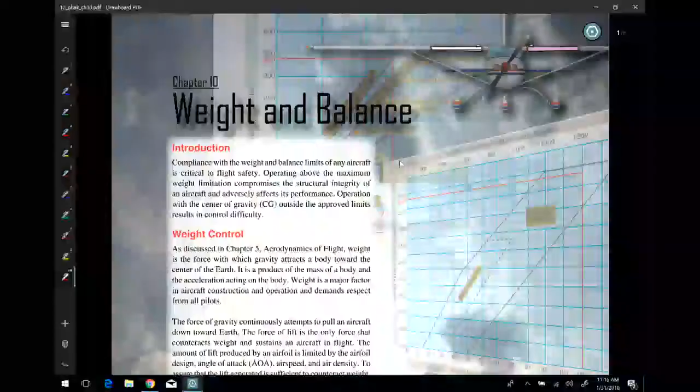So what I want to show you first here, again in Chapter 10, is we talk about, first of all, kind of the weight of the airplane. We know that the weight of an airplane impacts a lot of different things with regard to how that airplane, or if that airplane, is going to fly. So we have to talk about those things, and we have to know what it is.

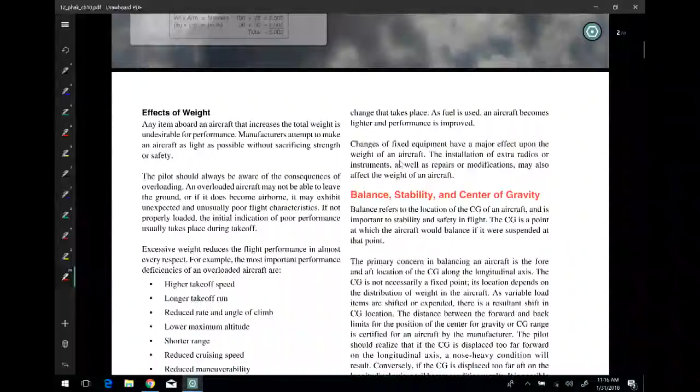So I want you to know all of these bullet points. When it says the most important performance deficiencies of an overloaded aircraft are, in other words, what are some of the bad things that a heavy airplane can do? So with this, you've got a higher takeoff speed, longer takeoff run, reduced rate and angle of climb, lower max altitude, shorter range, reduced cruising speed, reduced maneuverability, higher stall speed, higher approach and landing speed, longer landing roll, excessive weight on the nose wheel and or tail.

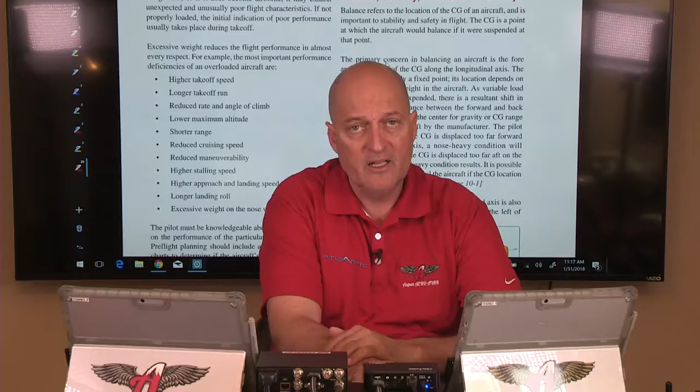How many awesome things does weight add to the equation? Well, not many. Unless you're thinking about carrying that extra passenger. Oh, I get to carry an extra passenger. Okay, there we go. Yeah, you might be able to take more people and more bags. That's always a good thing, depending upon what your mission is. But you have to know that everything that goes into that airplane, you have to account for from a weight and balance standpoint. So understand that just like high density altitudes can cause problems with the performance of an airplane, a heavy airplane also is not going to fly like a lighter airplane.

You have to know that, so it comes at a cost. What is that cost? Greater fuel consumption, may not be able to land where I want to land, may have to find an airport that's got a longer runway. All these different things you have to think about.

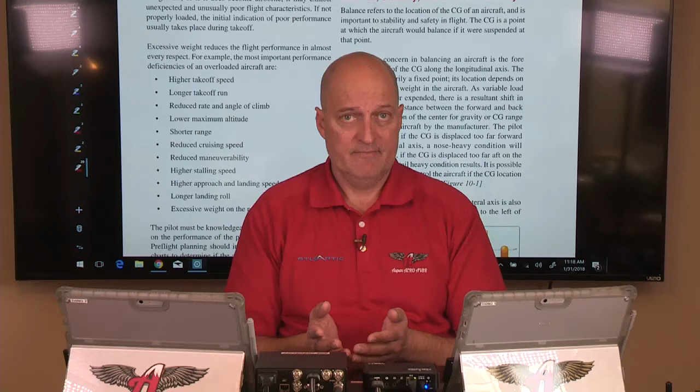But again, don't think of it in just the terms of getting off the ground. At some point that airplane is going to be put back on the ground. It's going to be up to you as to how elegantly that happens. So you have to know what happens to the weight and the balance in flight. More on that later.

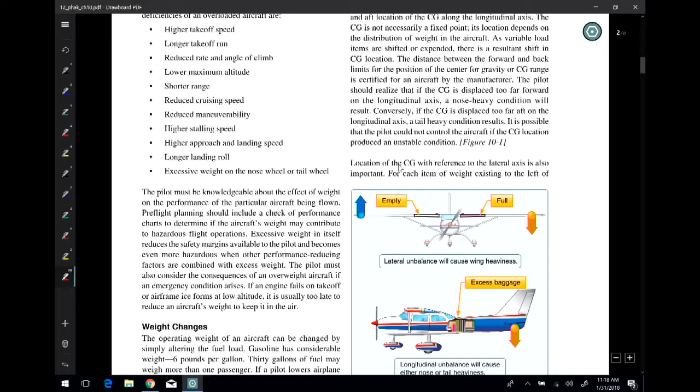So here we look at this, we look at the weight. How does weight change? Well, the one thing that happens when you're up there running that little spinny thingy at the front end of that airplane is you're burning fuel, right? So you are actually losing weight as you fly. Well, is that a good thing or a bad thing?

Well, in the Diamond DA40, it's really not going to be a bad thing at all, because it's going to make things a little easier for you when you land. But in the Stationair, that can be a little bit different.

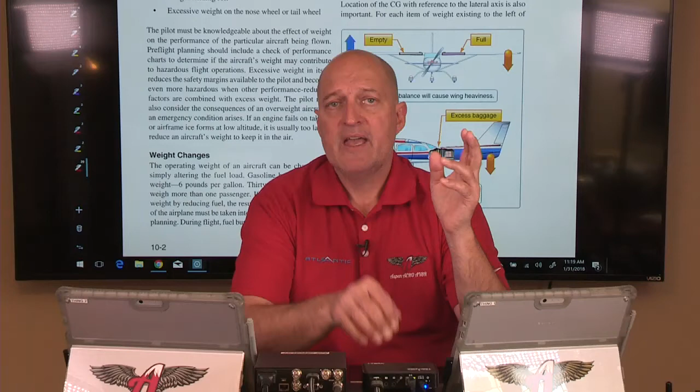The reason being is because my airplane is a lot heavier in the nose. And if I'm flying that airplane with just me and no bags, if I go with full fuel, as that fuel burns, my CG moves forward and forward and forward. If I'm not very careful, when I land that airplane, as I have used most of the fuel, I may not be able to bring the nose up sufficiently enough to land that airplane without damage.

And you're thinking, well, why would they make an airplane like that? Well, they make the airplanes like that to haul a bunch of stuff. And it flies better and it's happier when it's got a bunch of stuff in there.

But again, I don't always have to carry a bunch of stuff in there when I fly. So when I do, I need to account for that fuel burn and that reduction of weight in flight and have some form of ballast or weight that I have in the tail to make sure that when I land that airplane, that CG, that loading envelope, I'm still within that envelope.

So I know that I can count on good elevator performance at low air speeds, because that's what's going to be able to raise my nose, if I can lower the tail, right? So that's what I'm counting on.

But if I just did it without anything else in the airplane, I could have a problem when I try to land the airplane. That airplane kind of has an accident history that is caused by PIO, pilot-induced oscillation.

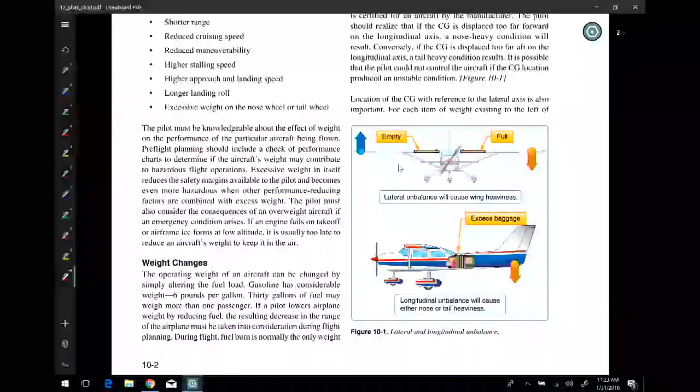Okay, those are some of the considerations. The fuel, where does the fuel go? The bags, where do the bags go?

I'm showing you this picture again. What about if the bags move? In this particular case, there's not a lot of place for those things to go. But what happens if that cargo moves?

There is a horrific video of a 747 cargo jet taking off somewhere in the Middle East. It takes off, and in the video that was actually taken by a dash cam of some driver in a truck driving by the airport, you see this 747 take off, and it just keeps rotating, rotating, rotating.

And it tries to go up, lowers a wing, comes back down, crashes, and explodes. This aircraft was carrying a tank. What they think happened is that on takeoff, when the airplane rotated, something happened with the chains - they snapped - and the tank moved further aft in the aircraft, and you couldn't control the airplane.

Number one, it's going to be less stable to begin with, but two, you may not be able to recover from a stall should one occur, because all of that weight's there. To recover from a stall, you've got to get that nose down. Well, if you've got a 55-ton Abrams tank that has just slid to the back of your airplane, you may not be able to get that nose down.

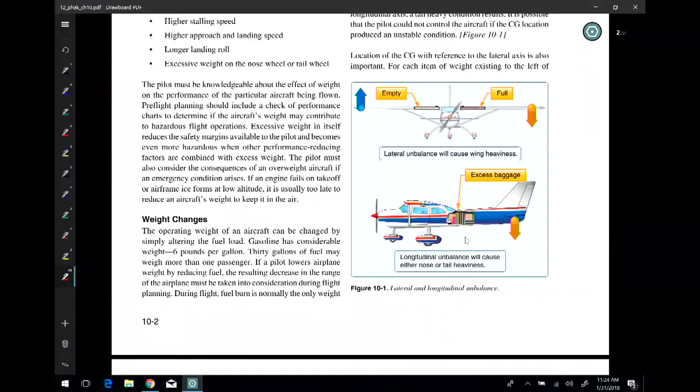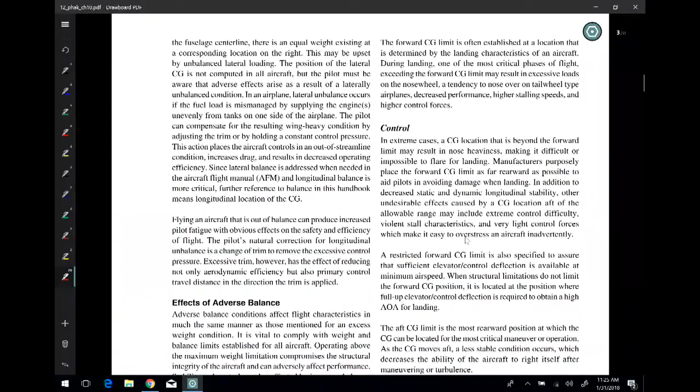So those are some of the things on the weight changes. You think about changing weight, but a lot of times you don't think about changing its position, but in some cases that can happen. So the effects of adverse balance, you guys can look at this.

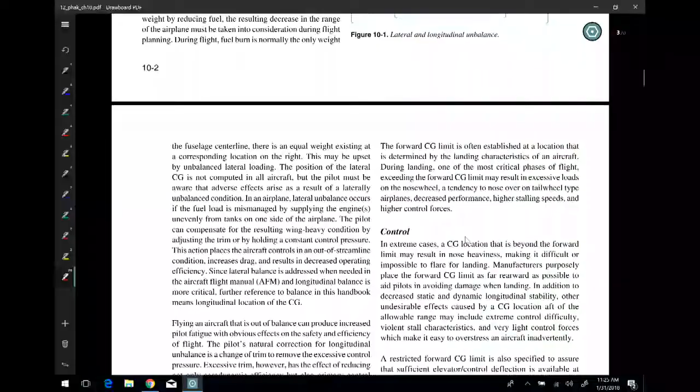Do you think it'll affect stability? Yep. And again, just as we talked about here with stability and the center of gravity, that's a big thing. Do you think it affects control? Yep, just for the reasons that I just talked about the effects of control.

So it comes down to the management of the weight and balance. That's what we have to look at.

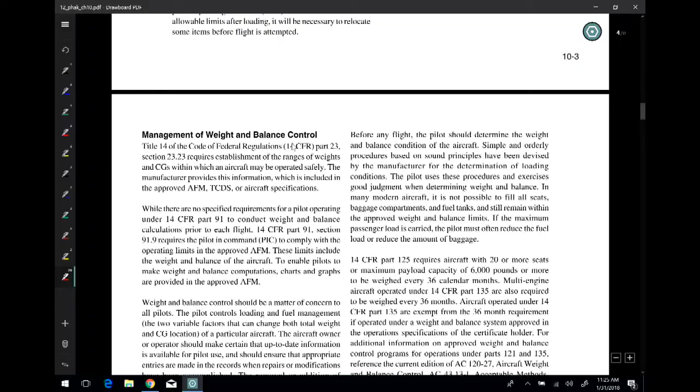It says right here that while there are no specified requirements for a pilot operating under 14 CFR Part 91, which is what we do, to conduct weight and balance calculations before each flight, 14 CFR Part 91 Section 91.9 requires the pilot in command to comply with the operating limits in the approved AFM. Those limits include the weight and balance of the aircraft.

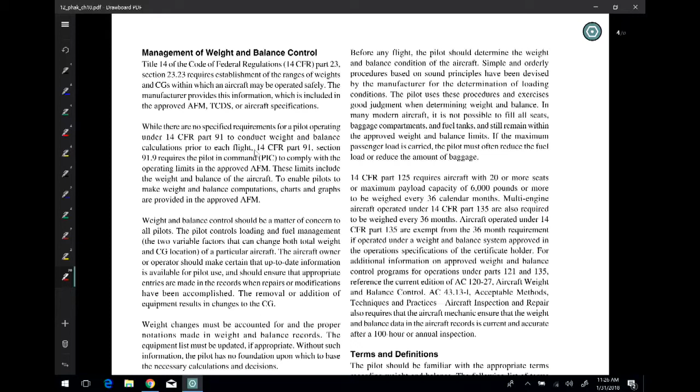And so with that, the AFMs, or the POHs, and we all know what those are now, will have a graph in there for your particular aircraft type. However, the actual weight and balance numbers themselves will be on a separate sheet of paper, one of the four documents that you have to have on board the airplane each and every time you fly.

One is the airworthiness certificate. Second one is the registration. The next one is the pilot's operating handbook, or the AFM. And then the fourth one is the weight and balance sheet. AROW, A-R-O-W: the airworthiness certificate, the registration, operating handbook, and the weight and balance sheet for that particular airplane.

That has to be on board the airplane anytime that you fly it, for you to fly that aircraft legally, okay? And the reason it's so important is because of the reasons that they just said here - if you don't have the airplane loaded within limits, you may not be able to fly it. And if you can fly it, you may not be able to recover it if something happens. That's why we do it.

Each aircraft is, when it's inspected, anytime equipment is either added or taken away from it, a new weight and balance sheet has to be prepared by an authorized mechanic or service person to be able to do this.

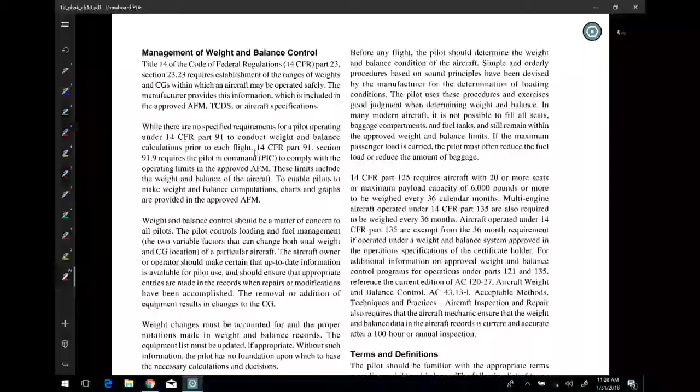So we look at the terms and definitions. Now, under the terms and definitions, you have the arm. This is what we refer to as a moment arm. Now, moment, a lot of us think in terms of time, but when we talk about this with regards to mathematics and physics, moment is going to be the effect of something. We'll talk about that in just a second.

So if we look here, the moment arm has to do with a particular distance. If we look at a distance from a particular thing, this is where we determine what the length of that arm happens to be.

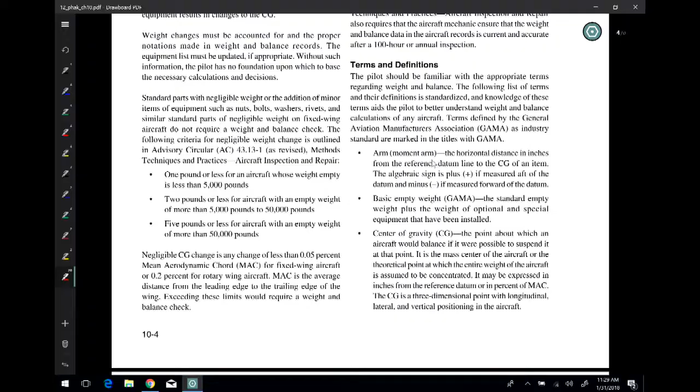Basic empty weight, we just kind of talked about that. Center of gravity, we sort of talked about that. CG limits, CG range, datum.

Where do we begin measuring that arm? We begin measuring that arm at a particular datum or datum plane, a certain place that we begin. For the Diamond DA-40, that certain place begins at the spinner. For my aircraft, it begins at the lower firewall, which is that point behind the engine, right there at the front of the firewall of my airplane. So it varies. Cirrus has this point out in space, somewhere out in front of the airplane, where you begin measurements, and I've never really understood that. But that's where you start, and that's kind of where it is. It has to do with that reference point of where you begin the measurements for the arm.

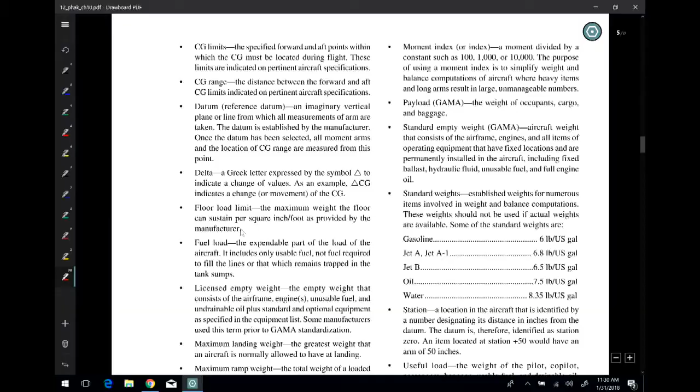Delta, this is a change. Anytime that there's a change of value, we talk about that as being a delta. Fuel load, you guys can read all of these, and I know that you already have, because I know that you did the reading, and I know that you know just how important anything that is a bullet point is.

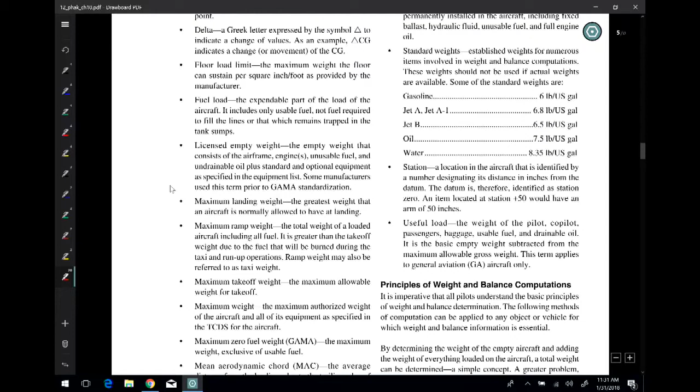So understanding what these terms and definitions are is extremely important, so that you know what it is in the world that we're actually talking about. So that when I talk about something like mean aerodynamic chord, you know what that is, right?

So, moment, the product of the weight of an item multiplied by its arm. Moments are expressed in pound inches, at least that's the way that we do it. And the total moment is the weight of the airplane multiplied by the distance between the datum and the CG. We'll talk about what that looks like. But I want you to think of moment as like an effect of something.

For instance, we'll do a demonstration in the classroom on Friday, where we'll take a weight, and that weight is going to feel differently based on where I put it. We'll talk about that in class on Friday.

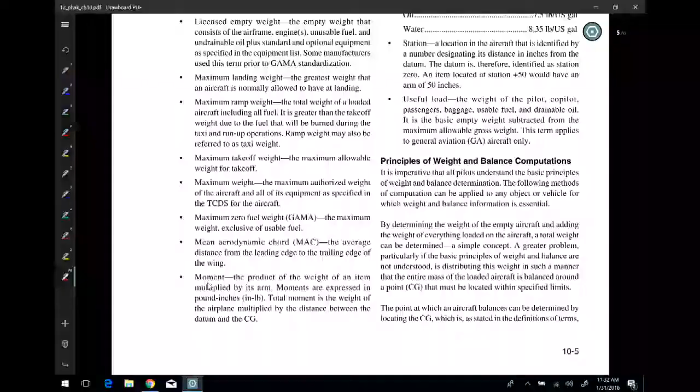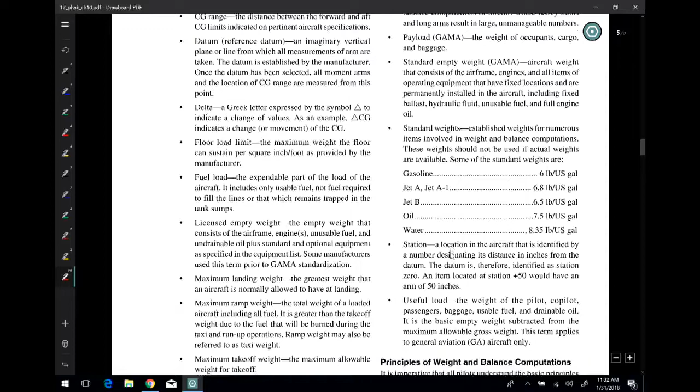We look at this: the moment index, payload, standard empty weight, standard weights. These are things that you have to know. And when I say that you have to know them, I want you to be prepared to know these things by Friday.

How much does a gallon of aviation gasoline weigh? What does Jet A weigh? How much does oil weigh? How many quarts in a gallon? How much does water weigh? Know that by Friday.

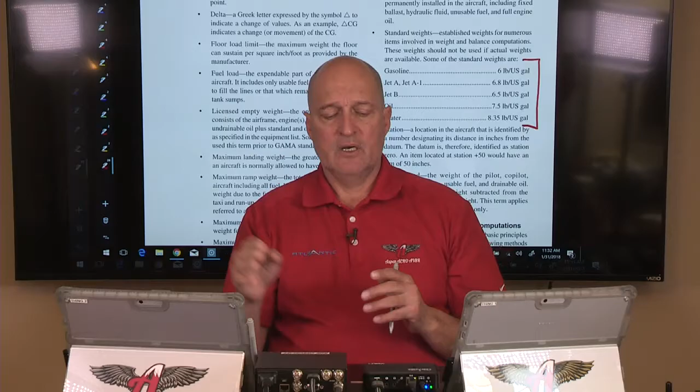Station. What is a station? Remember, we begin measuring the arm at the datum plane, or that datum point, the reference point where we begin the measurement. We end the measurement at a particular station somewhere along the way, down the longitudinal axis of the aircraft from the spinner to particular points.

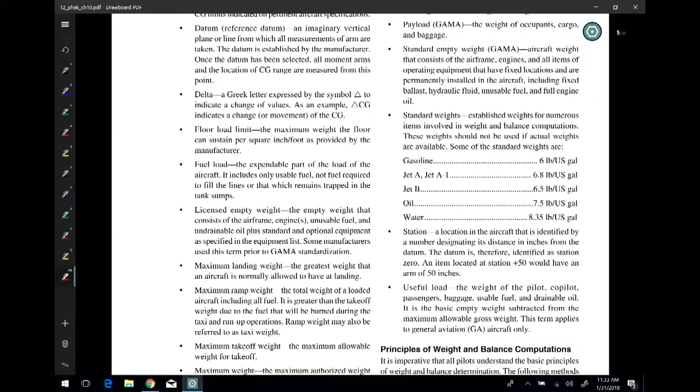So remember, we have payload, and then we have useful load. Understanding that, let's move to principles of weight and balance computations.

When you look at the example at the top here, at 10-3, this is a thing where you have a fulcrum point. Remember, it's like a teeter-totter, okay? You guys know what a teeter-totter is, right?

You've got this plank of wood on a bar, and if everything is all even at both sides, you can have some fun with somebody going up and down on the teeter-totter with a friend of yours. But if the friend of yours happens to be really, really light, that friend may get hoisted up into the air and never come back down until you do what?

Until you slide closer to the fulcrum point to even out that weight to allow your light friend at the other side to come on down. Remember that little exercise out there on the playground?

Playground physics. Don't you love it? So with this, it's the same type of thing, where we look at a datum point, or fulcrum in this case. You have something that weighs 50 pounds, that is 100 inches away from that fulcrum.

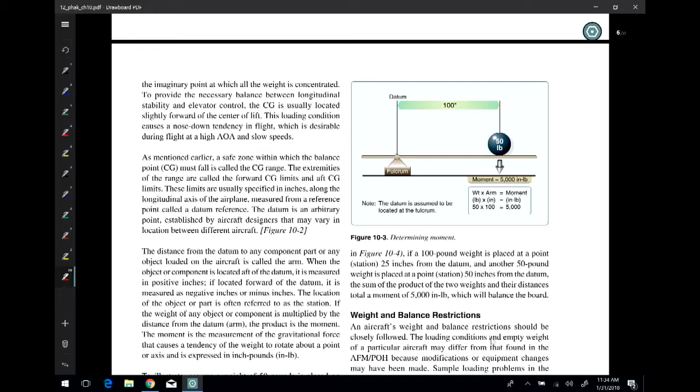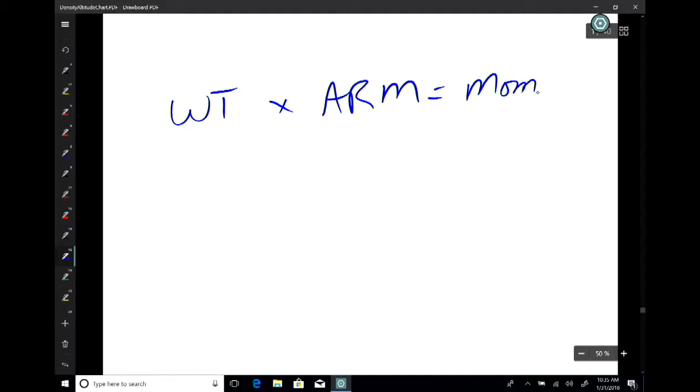So with this, the first thing we do is determine the moment for this particular weight. This is where I want you to memorize the following equation: weight times arm equals moment. The weight of the object multiplied by the distance of the arm equals your moment, or the effect of that weight at a particular distance.

Memorize it, know it, live it, love it, learn it, okay?

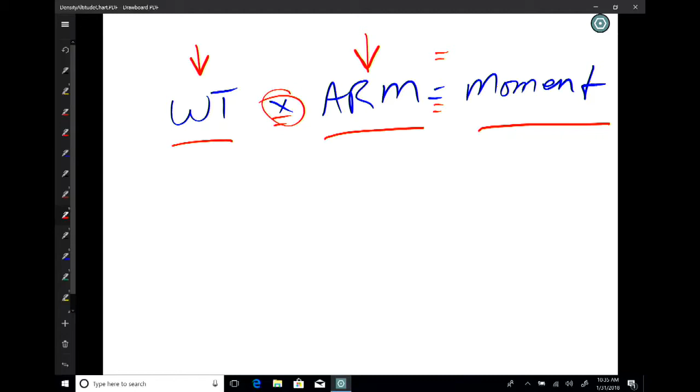Another way to express this equation, also algebraically, would be this: if you took the total moment and you took your total weight, that would equal your arm, or your center of gravity, CG. So simply by re-expressing the formula, we can also get another useful piece of information. These are the two things you must memorize.

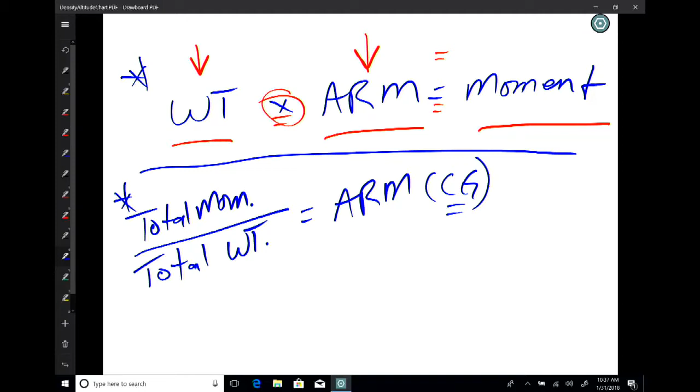Must memorize. Okay, so now we'll talk about how all of this stuff comes together. Give me just a second here. Okay, now...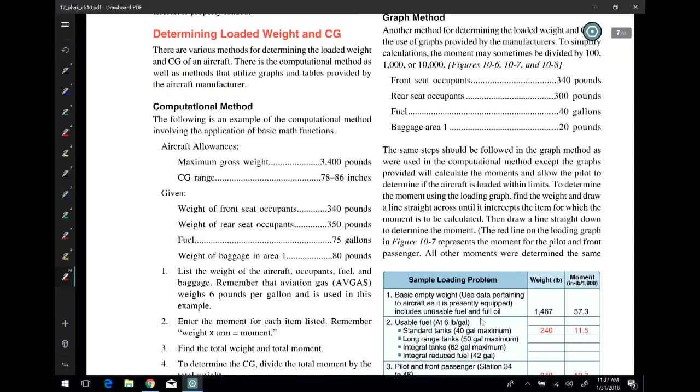As we look here, we're determining the loaded weight and the CG. With this, you're going to look at a lot of different ways that you can do this. The biggest thing I want to impress upon you at this point is this.

In order for you to do these calculations, you must resist the temptation to get sloppy. I've seen your handwriting. Lord, okay? You cannot be sloppy in your accounting for your weight and balance calculations. You have to keep everything in order.

So what we're going to do is create a way for you to keep your accounting in order. So remember what I said here. Whoops, I don't want that one. That's kind of thick. Let's try this one. Weight times arm equals moment, right?

So if we create a table here by which these calculations can occur in some logical fashion, this could help us solve our problems, right? Right. So we're going to learn how to create a table.

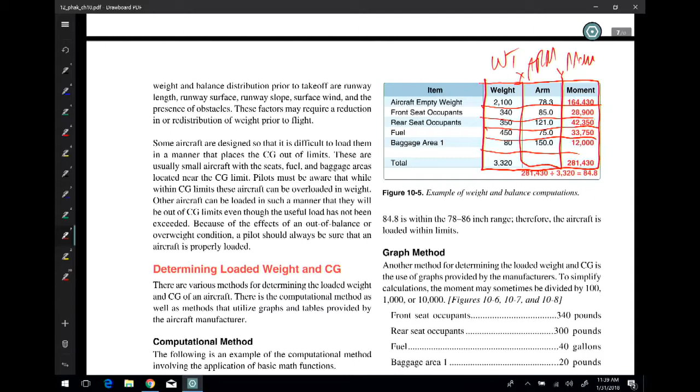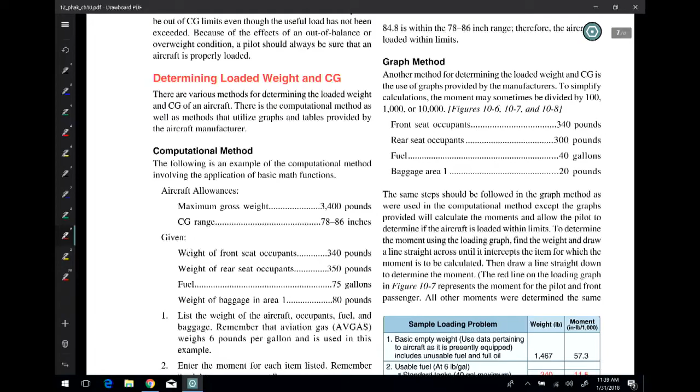Before we do, there's another way to do this. You have a tabular method, which is using a table, and then you have a graphical method, using a graph.

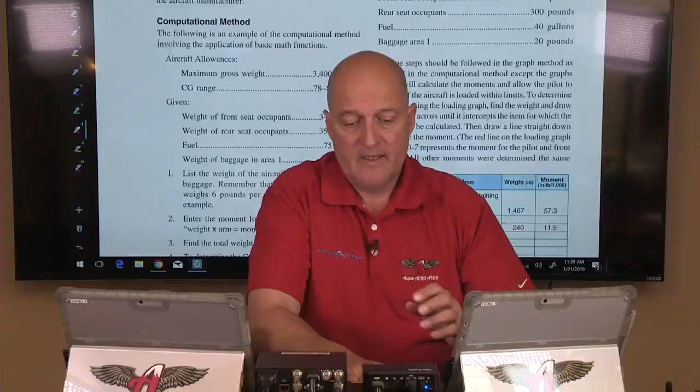Now, I'm going to tell you my bias here. With the tabular method, you're actually working with the numbers themselves. That's what we're working with, just hard data. The graphical method was produced to provide an easier way for pilots to be able to do weight and balance calculations.

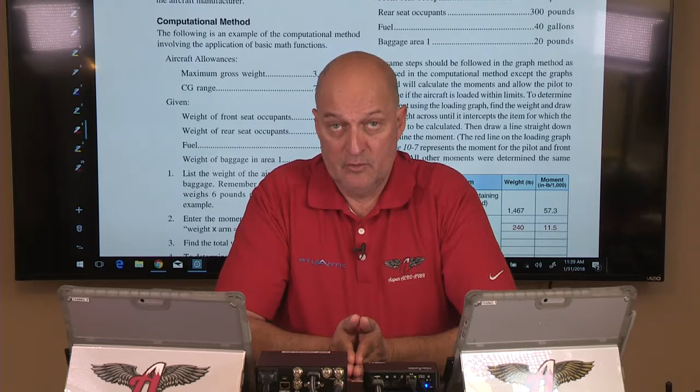The problem with the graphical method, in my view, is that not only are you there trying to make basic calculations that your life actually depends on, but you're also being judged by your ability to draw a straight line. There's some cartography or drafting skills required for you to do that, and it kind of depends on how you interpret where the lines intersect, which is going to help you with your weight and balance calculations for that aircraft.

I don't care for the graphical method. I just don't. However, a lot of aircraft manufacturers produce these calculations in graphical form, so we're going to learn how to do it to the best of our ability, but our go-to is going to be the numbers themselves. You're going to see two different ways to do it: the graphical method and the tabular method. Just know that my bias leans towards the tabular method, where we can actually use the numbers. Keep that in mind.

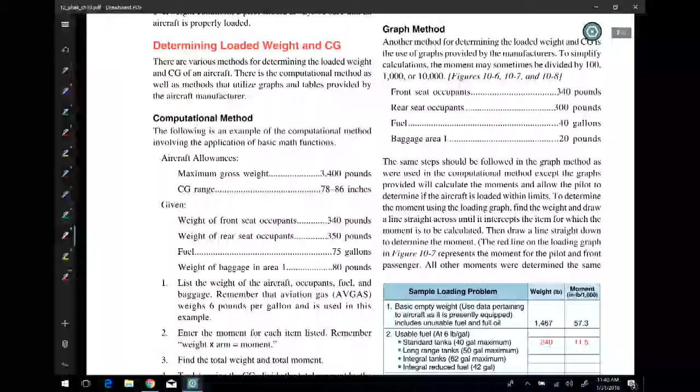So when you look at this, if you look down here at a sample loading problem, you can see that you have these blanks that you fill in. Here is a column, here is a row. Each row represents a station. Don't know what a station is? Go back to the vocabulary lessons you had a couple pages ago and make sure you know what that is.

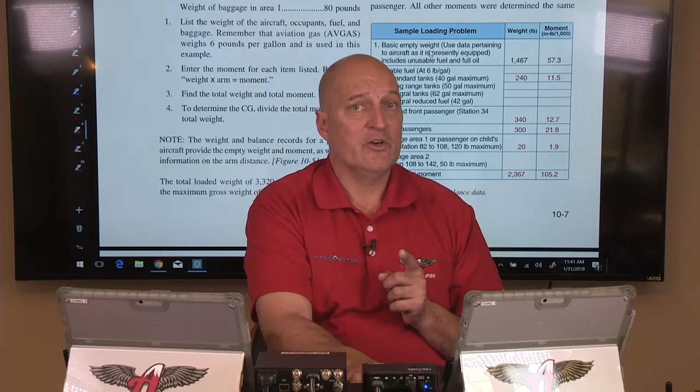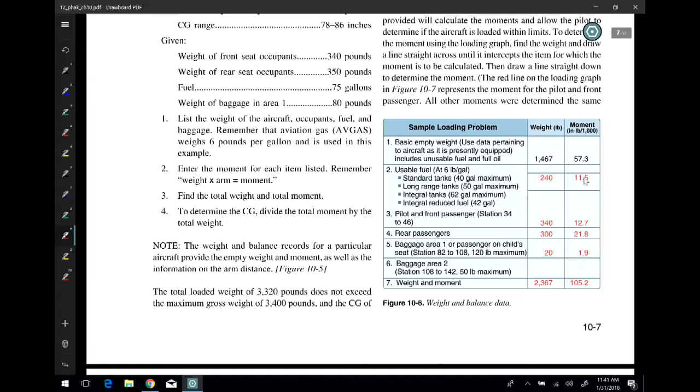Each one of these refers to a particular station, and at each station there's going to be a weight, and at some point we need to come up with a moment for this weight, because the moment part along with the total weight part is going to tell us where our CG is, and that center of gravity has to be within a prescribed range for that particular aircraft. So we have to know all that stuff in order to know: is my airplane okay to fly? That's kind of what we do.

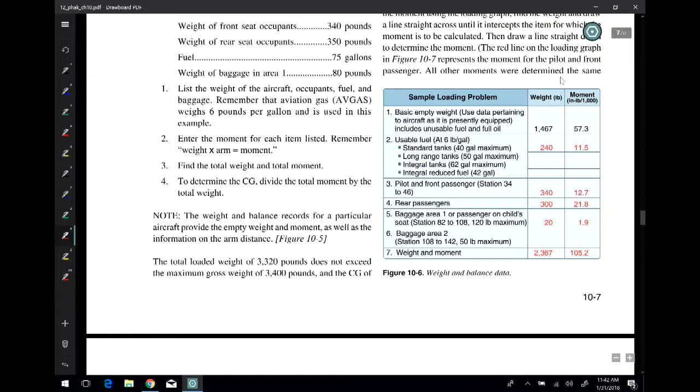But remember, in order to get to the moment, you've got to know what? The arm. So how in the heck do we do that? Well, here we go.

In the graphical method, you are asked to take a weight for a particular station to discern the moment. So let's take a look here just real quick. We have the weight over here, we have the moment over here. And what happens here is this.

The arm has been taken out of the equation for you. It is missing, represented by an angular value that the mathematicians and engineers have put out here on this graph. By merely putting the weight on a straight line here to intersect with this particular area of this particular station, in this case the pilot and front passenger, and then bringing that intersecting line straight down vertically until it hits the moment line, you determine what that moment is. So this is where they get this. They take the arm out of the equation on this stuff.

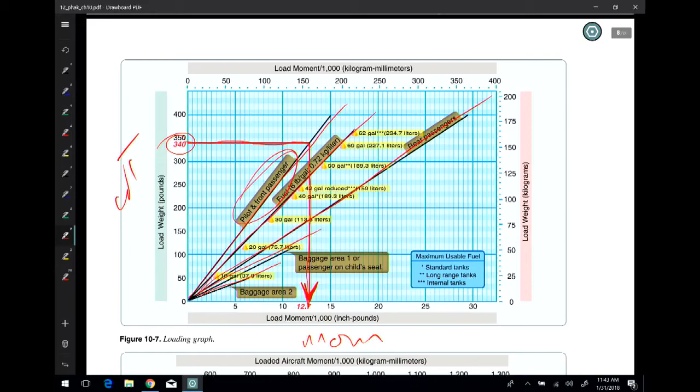But again, you've got to keep your lines straight or you'll never get the correct moment. And that's my problem with these graphs. So we're going to use them, but we're going to figure it out.

Then, once we know the total weight over here and we know the total moment here, we come up here like this, we come over here like this, and we see: does that computation fit within this loading envelope for this aircraft?

We have two different categories in this one: a normal category and a utility category. You can see the utility category is going to be lighter, and the normal category is going to be a little bit heavier. So this is how we use this information to see: does everything fit within here?

If it doesn't fit, and let's just say our final calculation was up here somewhere, would you fly that airplane? The answer there, of course, is no, you wouldn't, because the airplane is overweight and it's not within balance. So this is kind of how you use the graphical method, all right?

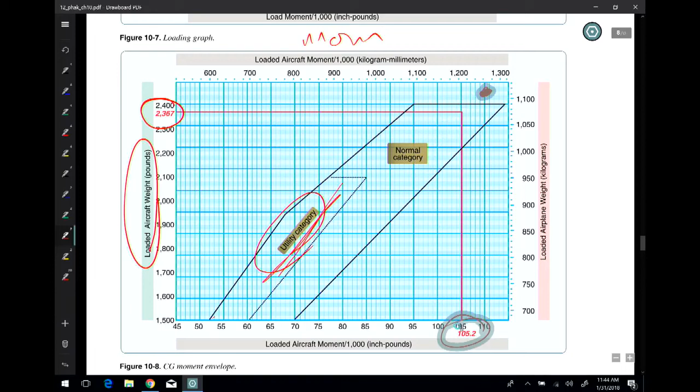So now, what I want you to do is this: I want you to read the next 5 pages. Remember what your assignment was, add 5 pages to it. Then on Friday, I'm going to show you how it all fits together, okay?

So, review this video as you must. Know in here what you've got to know. Remember those bullet points, ding, ding, ding, ding, ding. Remember the formulas, ding, ding, ding, ding, ding. This is going to be part of your note-taking, part of can you keep up with this class?